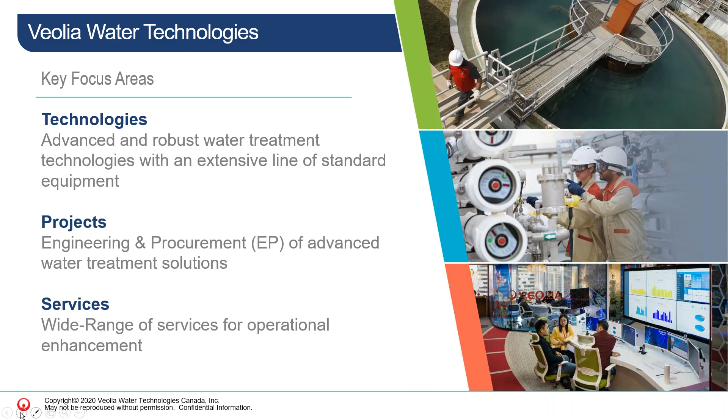To introduce our expert panelist for today, with us we have Daniel Lamarre, a process engineer at Veolia Water Technologies. Daniel graduated from École Polytechnique in Montreal and received a degree in chemical engineering, as well as a master's degree in environmental sciences from Polytechnique. Since graduating, Daniel worked in the biopharmaceutical field, as well as for different water treatment system manufacturers. During his career, this led him to work both in drinking water and wastewater applications for both municipal and industrial clients. His position brings him key areas such as R&D, taking new technologies and introducing them to the market, as well as process engineering on some very advanced full-scale projects. Daniel has been working at Veolia for the last 20 years as a process engineer and is a true expert in this type of technology.

So with us, Daniel, are you here? Yes, I am.

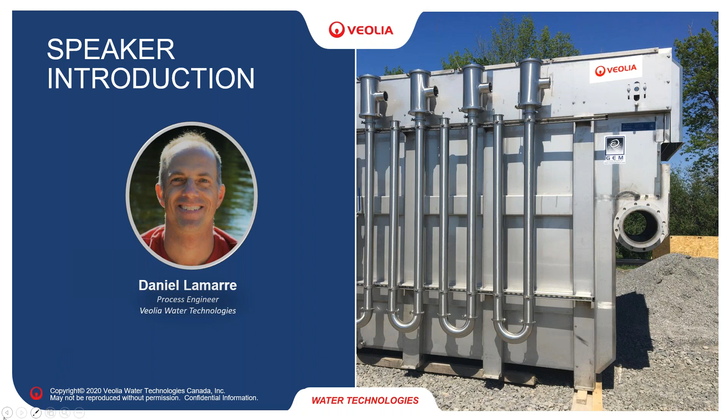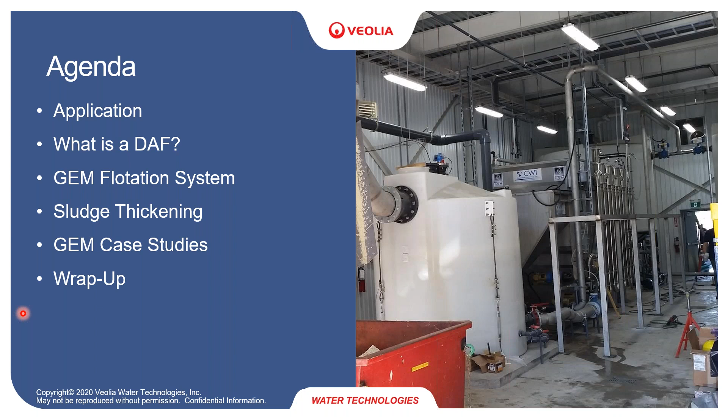Okay, so today's presentation is starting with the GEM system. So with the agenda, we'll go quite fast over what's a DAF system to try to get a comparison between what's a general traditional DAF system and what's different with the GEM flotation system, which is similar to some extent but also very different in other ways. Then go through sludge thickening, what can be done in terms of sludge handling with the GEM system. Then a few case studies, it's always good to know how this technology can be applied in full scale and real life, and then a little wrap up.

So the GEM system can be applied typically in food and beverage industry, and can be applied in many other industries, but it's a prime technology for food and beverage applications, mainly where effluents contain significant amounts of FOG and TSS, which is basically where a traditional DAF system is used. The system can be used as a standalone or upstream of biological treatment. Standalone is usually used for pre-treatment before sewer discharge, and with biological treatment downstream, usually if the final effluent needs to go to the environment. Sweet spot, of course, as I mentioned, is when there's lots of FOG and TSS. So the higher the concentration, the better the GEM is for that application, always when comparing to other treatment options on the market.

It's a very good application also where sludge disposal costs are relatively high, because one of the main characteristics of the GEM system is its ability to generate dry final sludge, which does reduce sludge disposal costs at the end. So typical markets, I would say almost all of the food and beverage market, well probably less in the beverage industry where the effluent is more soluble based, but as soon as you start getting TSS and especially FOG and TSS, then you're getting more and more in the sweet spot. So dairy industry, meat and poultry, of course, and then all of the others.

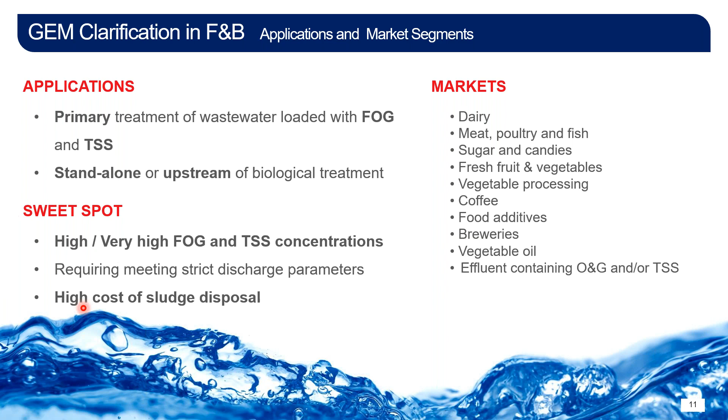So just a short summary of what's standard DAF technology, as it's used to do a comparison with the GEM system. As you probably all know, DAF technology is really dissolved air flotation. So the goal is to separate solids, and FOG - fat, oil and grease - is considered more or less as a suspended solid. So FOG and TSS together can be attached to micro bubbles, and this clump of particles floats to the surface, and then that float is skimmed off from the surface using a surface scraper, and that is sent as waste sludge, and then the treated effluent leaves from the bottom of this flotation tank as treated effluent.

Now, the driving force on a traditional DAF system is really this white water. So you need these micro bubbles to get the flotation of the solids. And how do you generate micro bubbles? You recirculate some of the treated effluent, pressurize it to a few bars, 6, 7, 8 bars typically, and then put that water stream in contact with pressurized air and dissolve that air into this high pressure water. And then once you drop down the pressure to ambient atmospheric pressure, you generate these micro bubbles. This actually visually is seen as white water - it just becomes white, just like when you open the tap at 2 o'clock in the morning, sometimes your glass of water turns white. So it's similar to this - it's tiny air bubbles that will attach to the solids.

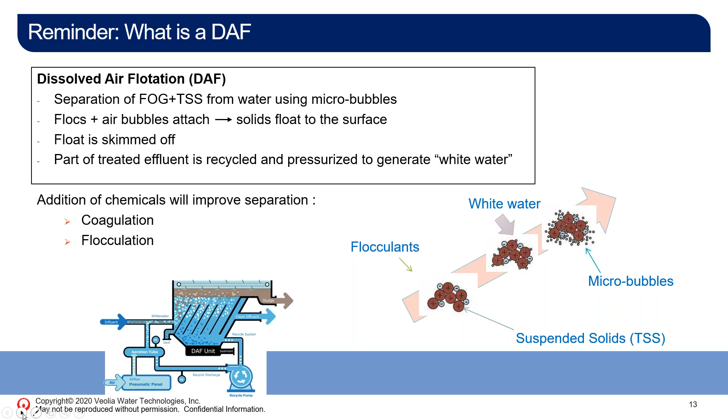Looking now at the GEM system, how it is similar and how it is different from a conventional DAF system. We can say that the GEM system is really a second generation dissolved air flotation system, while conventional DAFs have been around for decades. The GEM system isn't the new kid on the block, but it's still newer than the DAF system.

It is very efficient in terms of pollutant removal, providing FOG removal usually better than 98%, and TSS removal 95% plus. That's one of the first advantages of the GEM system as compared to a DAF - the very high efficiency - while you would normally see something like 90% removal with the conventional DAF system. So super high pollutant removal efficiency.

Then the GEM, as written everywhere in this presentation, even in the title, does generate a drier sludge than any other DAF system on the market, and that will allow significant savings in terms of sludge disposal costs.

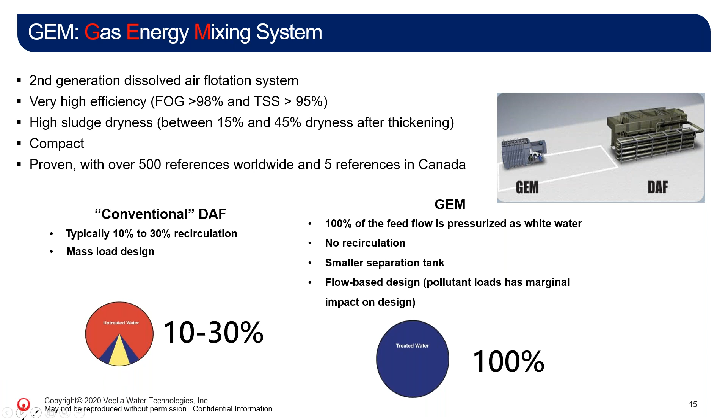So what happens within the GEM system? If we follow the drop of water through these 5 steps, the first step is coagulant injection, similar to conventional DAF - you need chemical conditioning, but here only coagulant injection. Coagulation is done upstream, usually upstream of the feed pump, as far upstream as possible. You can never have enough coagulation tank time.

Then the water goes through the feed pump, mounted below the GEM unit, so 100% of the feed flow gets pumped and pressurized. Then the water goes through a series of mixing heads - 5 to 6 heads depending on the model of the GEM system - and several things happen within these heads.

Within the first few heads, we have compressed air injection, and the goal is to dissolve air into 100% of the feed flow. Once this is done, after going through the first 2 or 3 heads, then through each of these mixing heads there's a pressure drop, and as the pressure drops, you start generating micro bubbles that will later be used to float the solids in the separation tank.

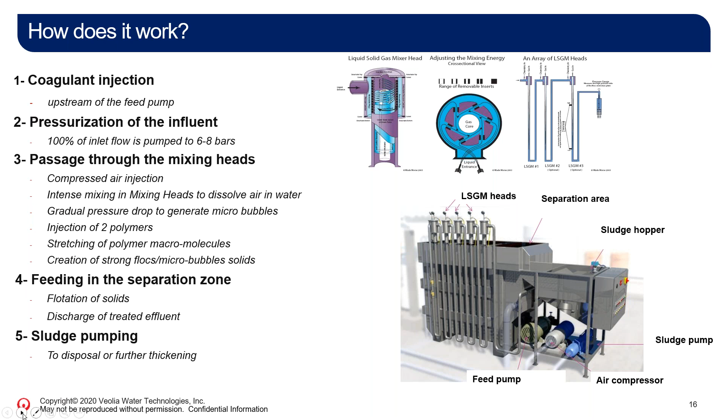So what really happens in the GEM system as compared to the conventional DAF explains some of the performance that can be obtained in the GEM system.

Going a little behind what happens in the conventional DAF, this process is really driven by a collision approach, where the goal is to create large flocs using polymer and coagulant. You have the solids, FOG, all attached together forming one big floc.

This is injected into a tank where you inject at the same time micro bubbles from the whitewater recycle loop. These micro bubbles attach to the periphery, the external part of the floc. Then this floc, loaded with micro bubbles, will float up to the top of the separation tank and be skimmed off.

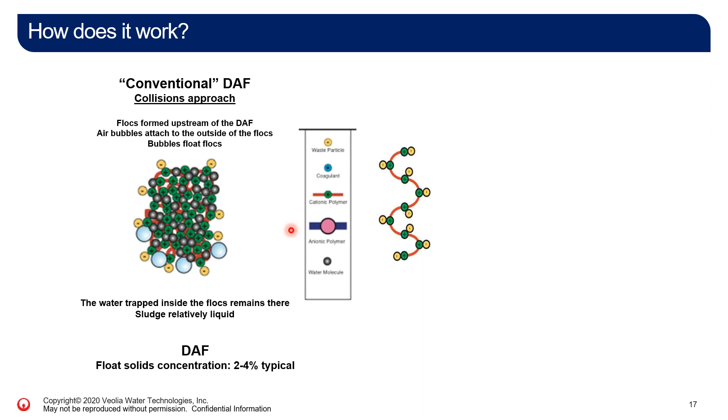And this is different from the GEM. In the GEM system, we're starting with a polymer backbone, shown here as one big polymer. The polymer used in the GEM system is a macropolymer, a very large polymer molecule.

What you want to do in one of the mixing heads is uncoil this polymer strand. Once it's uncoiled, attach the coagulated floc, the microfloc, to the polymer strand. Then as the water droplet leaves the mixing heads, the polymer strand will begin to recoil on itself.

So the air bubbles are attached within the floc, along the polymer backbone, which we have here.

We see in this picture the same components: micro air bubbles, which are the blue dots, and the black dots, which are the water molecules. So we're generating a floc that is somehow different. Now the air bubbles are everywhere within the floc that was formed.

Once you release the pressure and inject this floc into the separation zone, the micro bubbles that were generated at a few bars are now expanding because you're releasing pressure. As they expand, the air bubbles are actually pushing the water droplets out of the floc. That's one of the reasons the generated floc and solid sludge will be drier with the GEM system than with the conventional DAF system.

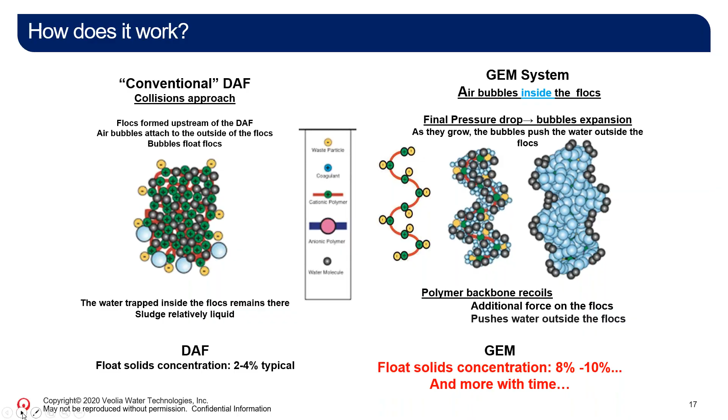Which brings us to the sludge thickening part. As I just mentioned, sludge thickening is very easy with GEM floats because the flocs that are generated are very strong and will float for weeks if you let them float on top of a static tank.

So the idea to thicken further the GEM solids is to let the solids stay in a static tank, leave them there for a few hours to a few days. Just by the action of the air bubbles and the polymer recoiling, the dewatering will happen by itself without using a costly centrifuge, for example.

This will generate this drier sludge, which we see here as one example. This one was probably 35% out of a dairy application. The thickener itself is just a gravity thickener.

It's actually a conical shaped plastic tank that we use. The float is just pumped into the static tank. The thickened solids float on top of the water, and a clear water phase is generated at the bottom. You can remove the water phase from time to time.

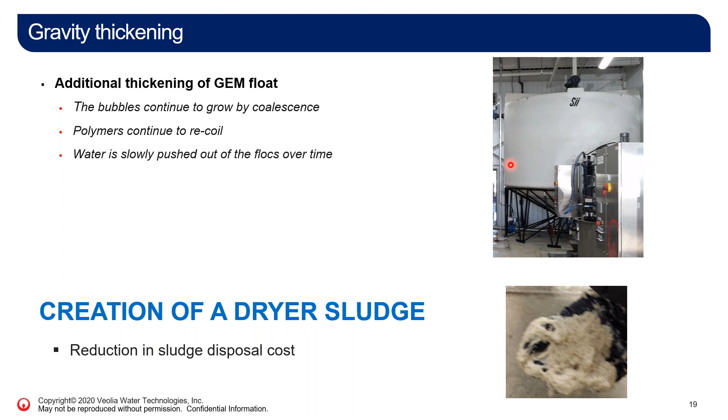Typical design parameter for this tank is 24 to 48 hour retention. As I mentioned, the flocs are very stable and will not break like the floc of a standard DAF would after a few hours. These flocs are stable for weeks - if you put them in a beaker, they will still be there in several weeks.

So the goal is to create a liquid undernatant, which is usually returned to the EQ tank for reprocessing through the GEM. And of course, the number one goal is to create a very dense supernatant, which is the thickened sludge. So we're expecting usually 15 to 25% plus solids concentration.

That depends greatly on which application. Usually the higher the FOG content, the higher the sludge concentration. We did measure up to 45% at one occasion on a dairy effluent.

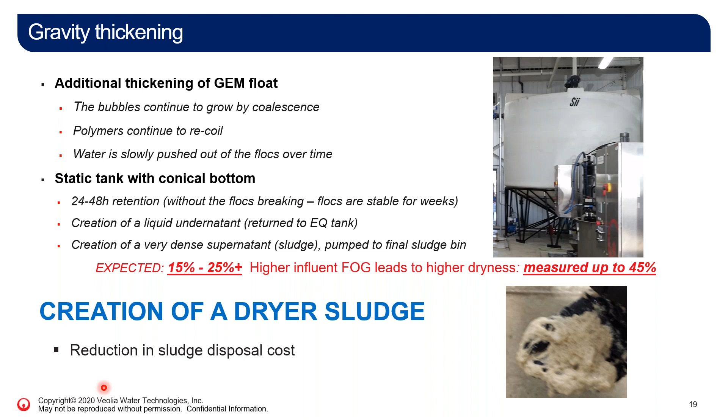Of course, the impact of getting drier sludge is really in the sludge disposal cost. Let's take as an example a dairy application we did in Canada, designed for a flow of 2,400 cubic meters a day. The GEM sludge dryness after thickening, measured in piloting, was 22%. That was after about 12 hours of thickening.

The conventional DAF system would provide a dryness of 5%, and considering a sludge disposal cost of $50 per cubic meter, the savings generated by the GEM system were $680,000 yearly, just on sludge disposal cost.

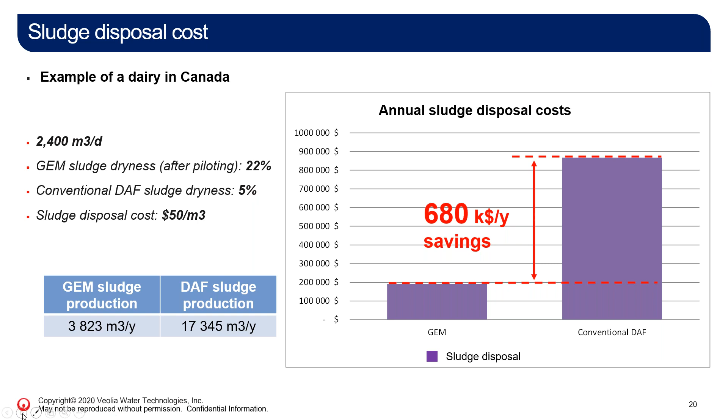There is thus a clear benefit in trying to generate as dry as possible a final sludge. The gravity thickening - why does it work so good? We did mention the way the flocs are formed. There's another few tricks in there.

One of them being the use of an organic coagulant. In most applications, we try to use this organic coagulant, which will not generate any hydroxides, which come with some linked water that is very difficult to dewater.

In some applications, metal salts are mandatory. For example, in meat processing applications, we usually will use some ferric to some extent, and that tends to generate a more watery float. But as much as we can, we try to use organic coagulant, which will bring the thicker sludge.

Also, the air injection in 100% of the feed flow is important. And of course, the use of the two polymers, as explained earlier, makes most of the difference.

Just to tell you that the sludge is very stable. It can remain there for days and weeks. You can even mechanically stir the sludge, and we tried it - you'd think you break the sludge and the flocs, and that the sludge will get more and more watery.

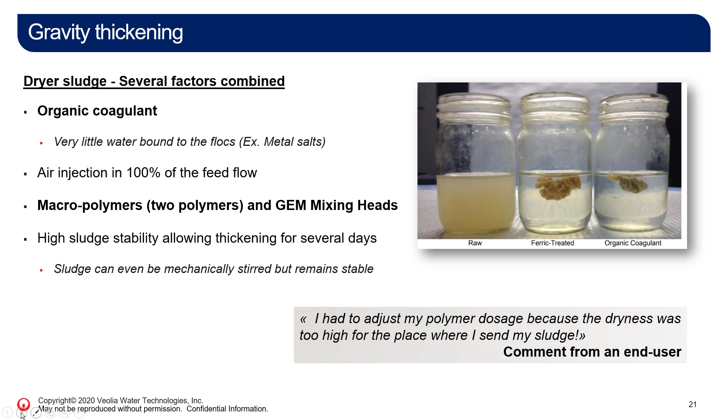So this is usually good when you can end up with very, very thick solids, even too thick for your final disposal. You can always adjust the final sludge concentration by just reducing usually one or the two polymer dosage concentrations.

Does it work with any effluent? Well, most of them. So here's a few of the jar tests that we can do on several different applications.

Most of them are quite rich in oil and greases, but not all of them. Even the candy applications did work great.

Slaughterhouse wastewater has lots of TKN, lots of meat and blood, and in order to break the blood emulsion, you do need some iron. So adding some ferric, with or without the organic coagulant, usually provides excellent results.

One of the characteristics you see from running some jar tests—these are all jar tests we run in-house in our lab—is that when you do the GEM system lab test, you end up with this clear water and a very thick clump of solids, which is quite representative of a GEM system operation.

If you use the same wastewater and do a conventional DAF system lab test, you will end up with one thick layer of sludge, but it remains a layer, not a thick clump as shown in all of these GEM system applications. So that's the first indication that the final sludge is quite thick and concentrated.

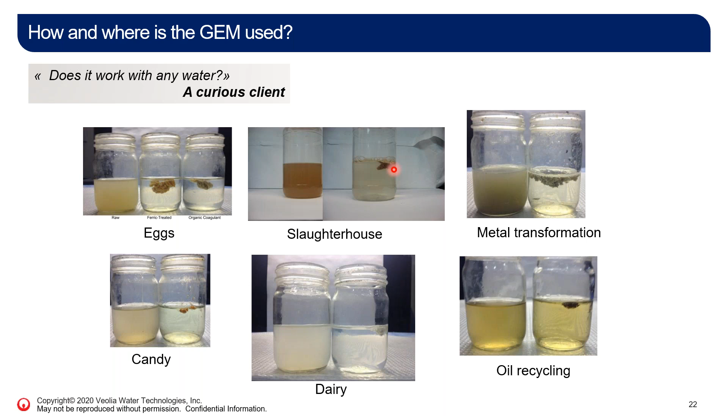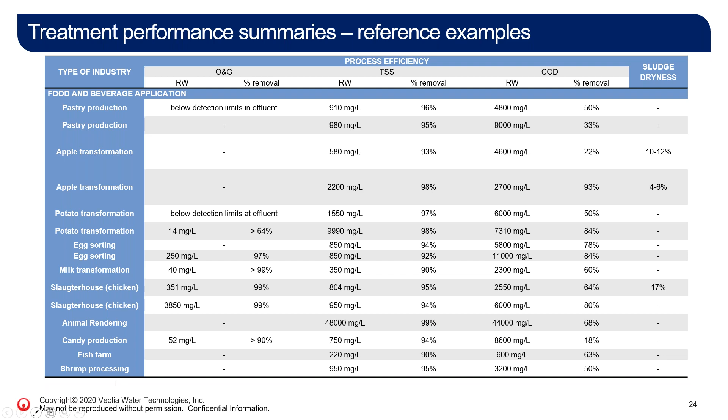So all that being said, let's say you have one potential project in mind and want to know if your effluent is treatable and what kind of results you could expect from the GEM system.

The pathway is quite simple. First off, based on our experience, we know more or less which applications are good and which aren't for the GEM system. Mostly in the food and beverage market, most applications are quite well suited to the GEM system.

The first step would be for you to send us a sample so we can run a jar test, which can be used to predict the chemical dosage requirements for coagulant and polymer, and of course predict the performance for TSS, FOG removal, and other objectives if you have them in mind.

These tests can be run quite fast, within 24 to 48 hours. So just contact us and we will provide you with the sampling methods and everything else needed.

One thing this lab test does not do is predict the final sludge dryness after gravity thickening, because the sample volumes are just too small. We would need to do several, let's say 50, of these jar tests and capture all of the floating solids together to get a significant thick sludge volume that could be representative. So we try not to use these to predict the dryness of the sludge.

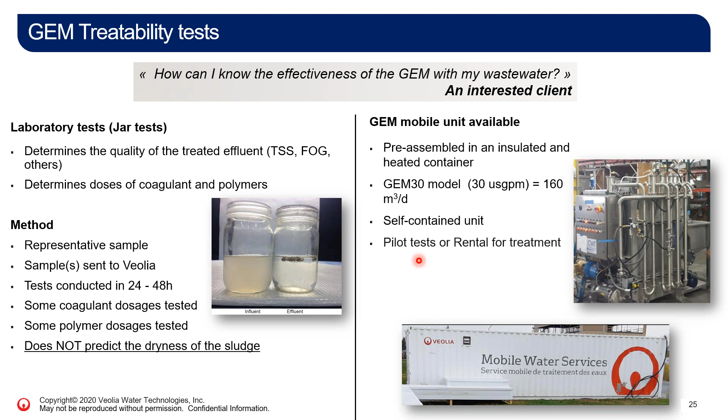The activated sludge was receiving way too much organic load and was actually suffocating, even though they were injecting lots and lots of process air into it. That was also generating a significant sludge management problem.

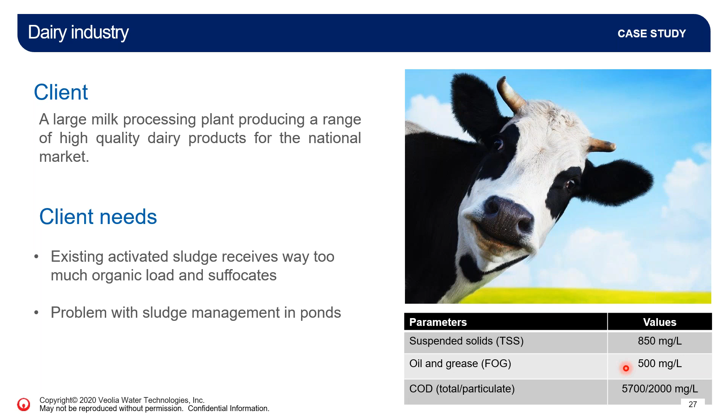When they contacted us, we told them the first thing they should do is think of a pre-treatment upstream of their activated sludge. The water characteristics here were about 800 milligrams per liter of suspended solids and about 500 milligrams per liter of FOG—lots of FOG, which is typical for the dairy industry and makes this kind of industry a very good market, a very good application, for the GEM system.

So the solution for them was a GEM system treating 100 meter cubes per hour, so that's 2,400 meter cubes a day.

And the sludge dryness here was actually incredible, 35 to 47%. So you can see in the final bin what this final cake looked like. It's mainly FOG from fat, oil, and grease from the milk processing activities. It actually looks like curd at the end, so it's very, very dry.

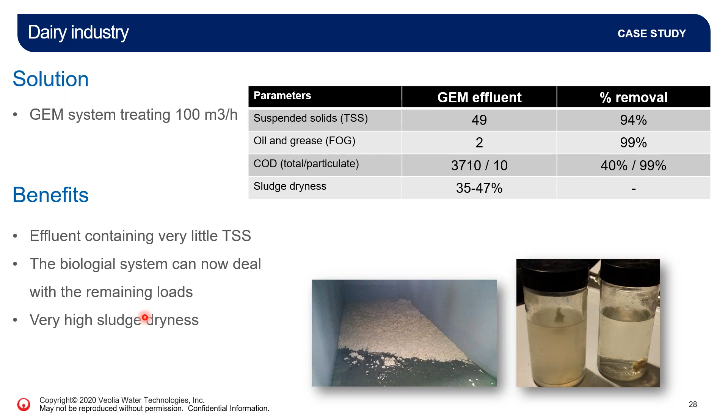The reason this industry went for a GEM system rather than a conventional DAF, even though the DAF would have provided a very significant removal of FOG and TSS, was because there was an economical reason behind it as well.

The GEM system, when comparing operating costs, was offering significant savings. If you were to just compare a conventional DAF with a GEM system, with the DAF generating just the float sent to disposal, so this 3-4% solid sludge sent to disposal without any dewatering, then there would be a very significant difference in operating cost.

So when adding a centrifuge to dewater the conventional DAF sludge, the DAF sludge volume was reduced significantly, which did reduce the sludge disposal costs, almost $1 million here per year. So that was reduced significantly, but still the delta was more than $600,000 a year between the two options.

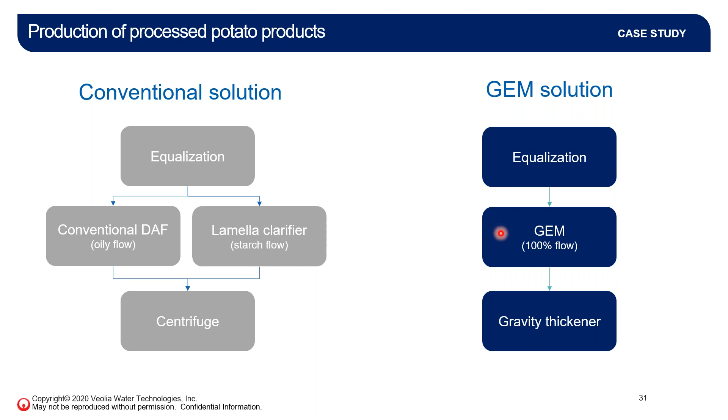What was also very neat for them was this very thick sludge production of 12 to 15% solids. And after thickening, this float could be thickened up to 35% solids.

The final product here, this final sludge, is mostly FOG and potato byproducts. And the goal of this client was to minimize sludge disposal costs. One option for him was to just take the final sludge and use it for animal feed.

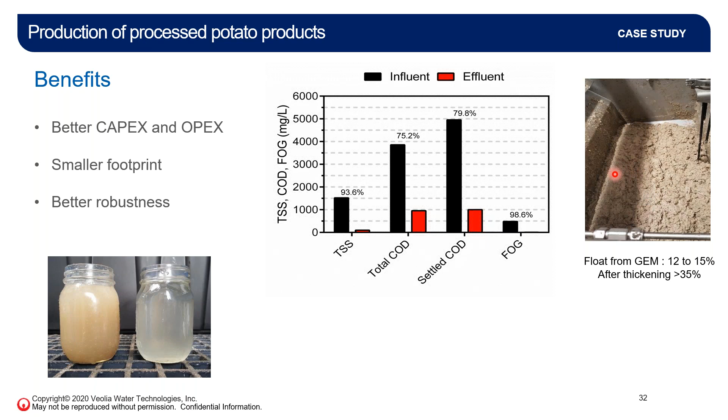And that's exactly how the project turned out at the end. So a GEM system was installed, treating 4,500 meter cubes a day, with the final product being used as animal feed, using Veolia's Hydrex chemicals that are approved by the CFIA in Canada to be used as animal feed under certain conditions, which of course are met here in the current case.

And then their sludge disposal costs was reduced to almost nothing, since the farmers out there would take this final product for free to be used by them as animal feed.

Considering all of this, and without considering that the final sludge is used as animal feed, but doing a side-by-side comparison of operating costs and capital costs for the two options presented earlier, and considering $50 per meter cube for sludge disposal in both cases, running with the GEM system rather than the conventional approach proved savings of more than $750,000 per year, plus some significant capital cost savings.

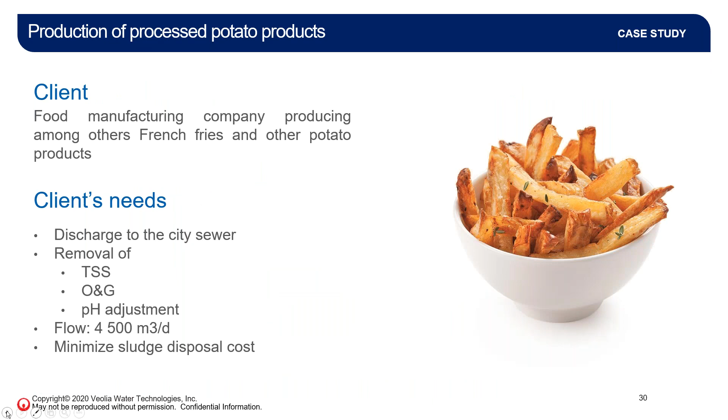Even though we are using three chemicals with the GEM system - one coagulant and two polymers - while conventional DAF systems use only two, usually one coagulant and one polymer, the coagulant dosage, mainly for emulsion breaking, can be quite significant on a conventional DAF unit using ferric or aluminum. In order to break the emulsion, the dosage will very fast become very high and eventually lower the pH significantly.

So you may also end up having to adjust pH when you do your coagulation. That's where the GEM system is quite efficient in terms of chemical dosage. This coagulant, especially the organic coagulant, is very efficient at emulsion breaking. Even though on a per kilogram basis the organic coagulant is significantly more expensive than a metal-based coagulant, the dosages are much lower, which makes the whole chemical dosage cost quite competitive with the GEM system.